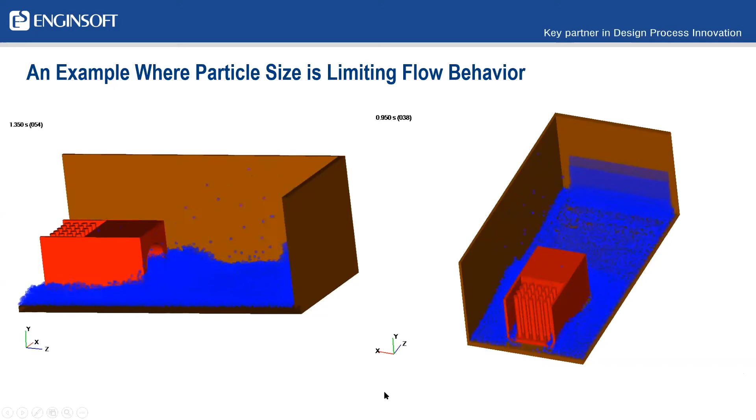This is the problem that the flow replay and flow record features are designed to solve. So what does it actually do? It helps you create a model where you're able to refine and use smaller particles in a subset of your model. The way this is done is in two simulations.

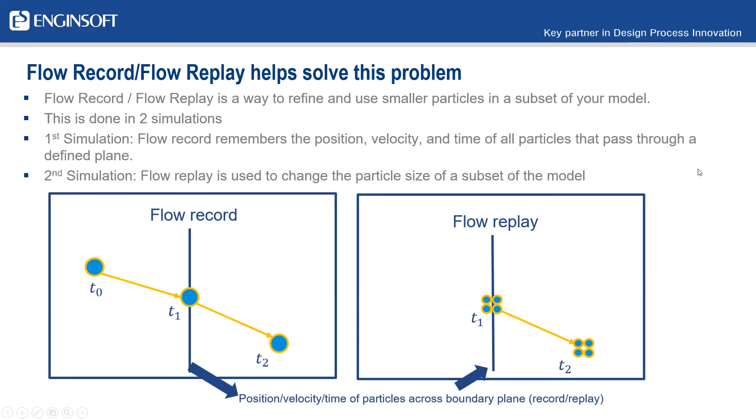In the first, you'll define a flow record plane where any particles that pass through that plane will essentially be recorded - its position, velocity, and the time of passing that boundary plane. Then you can go back and run a second simulation and use that recorded plane as an inflow of sorts. It's a little different from an inflow in that the exact location of those particles passing through the plane is recorded, and exactly what you had run previously is now used in the new simulation, so you can be sure you're getting the same flow behavior as in your previous simulation. We'll take a look at this example to see how that works.

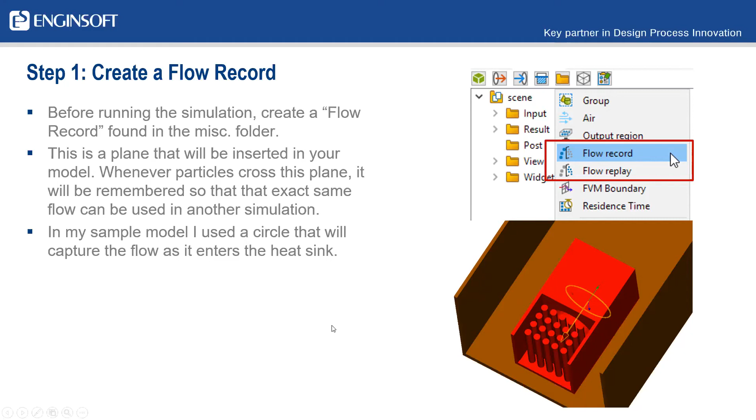The first step is a pretty simple process, but it does involve two simulations. First, create a flow record, found in this miscellaneous folder. You click on flow record and it will look like an inflow, which you can define in different ways. In this example I used a circle, because that fit the geometry I was trying to record flow through. I inserted that circle close to the fins of my heat sink so I could really get exactly the region I wanted. The closer you are to your problem area, the smaller particle size you can end up using. Everything that passes through that circle in the simulation will be recorded, and it will remember all those particles that pass through that plane.

Second step is very simple - you run the simulation. In this example there's no special tricks in this step. You run the simulation just as you normally would with the coarse particle size, and as it's running, it's recording all that information about what's passing through that plane.

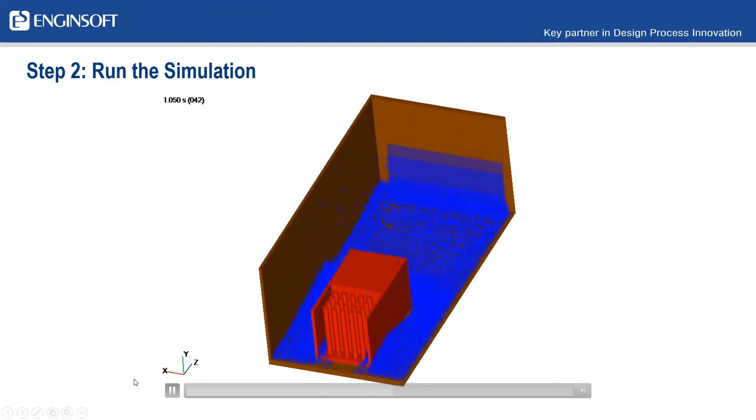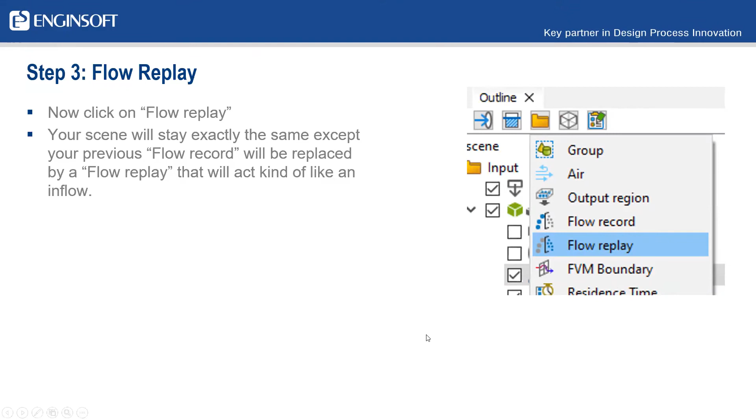Then after that simulation is complete, you click flow replay, which is right next to flow record in the GUI. When you do that, everything in your simulation stays the same except what was previously a flow record icon will be replaced by a flow replay icon. That icon acts just like an inflow. So you define your fluid that you want to use, treating it just like you would an inflow. Then all you have to do is change the particle size and rerun that simulation.

In my example, I changed the particle size from 1 millimeter to 0.2 millimeters, so divided it by 5, and reran the simulation looking at just that area around the heat sink. The flow replay acts kind of like an inflow, except that, as I mentioned, it will remember where particles are passing through that plane. The particles won't come out as a circle - it will remember exactly where the particles came through that plane and use that as the inflow behavior.

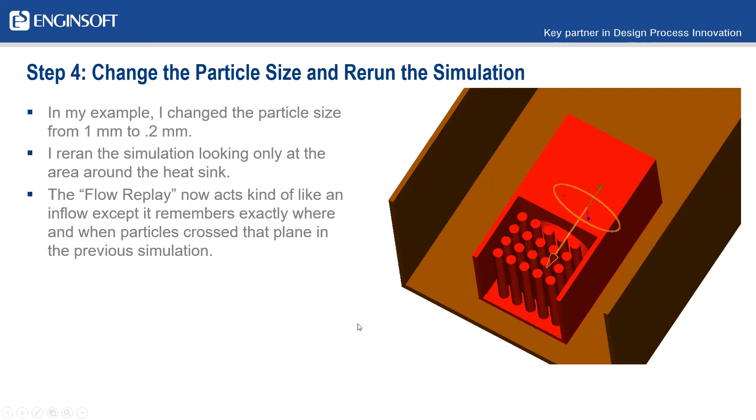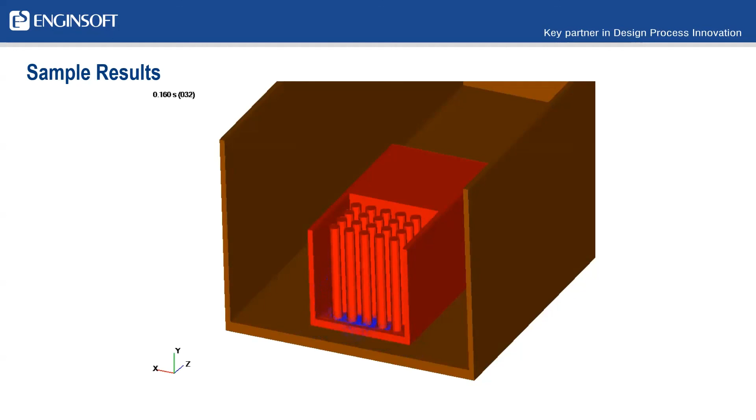So I think this is a very valuable tool. I run across this problem all the time when using ParticleWorks - there's this larger flow behavior I'm trying to capture, but then sometimes I just want to go into the details a little more and capture some of this more refined flow in a specific region. It's something I know you've come across, and it's quite valuable if you make use of this to create submodels and get some of that more detailed flow behavior along with your large scale overall view.